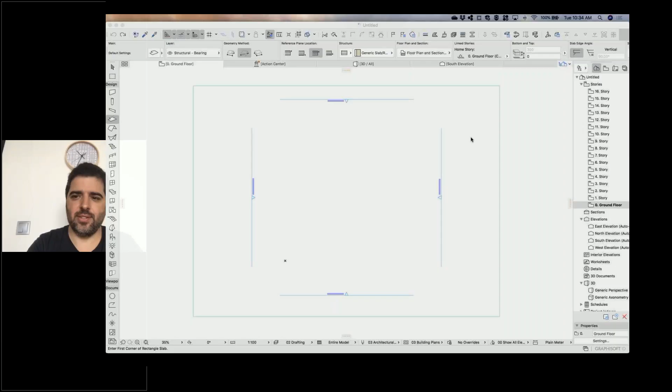So, okay, here we go now. I will share my screen. So here we go. Okay, so I trust that everyone is seeing the screen.

Yes. Okay, perfect. So guys, I just opened a file with an ArchiCAD 24 default template. Since this is going to be a multi-story building, I also went to the project map, and under the stories, I right-clicked. I went to the story settings, and I just changed the height of the first 5 stories to 5 meters, and then I kept inserting above more stories to have

16. Let's say we want to go into 20 stories, so we just click to insert above, and you will duplicate the number of stories with the height that we have assumed. So let's do this, all of you. Just make from ground floor to the 4th story a 5 meter story height. Then from the 5th to the 20th, a 4 meter story height. And then, very important, the story where you have clicked last when you click OK, that will be the story that you will end up with here.

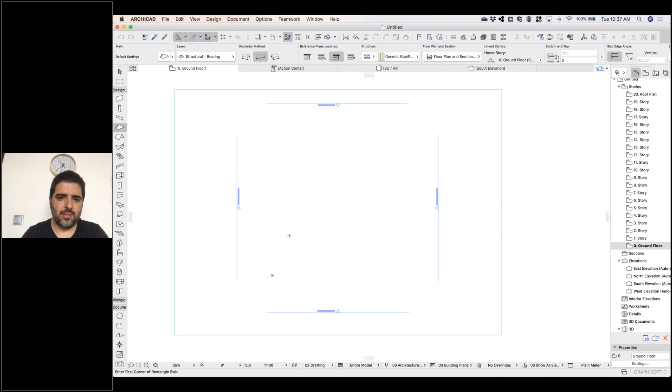So we click OK, and you see again, because I had this one selected, this is the story that we go to. So let's double click on the ground floor. We go back to the ground floor and we're going to start our design here. Also very important, we have by default in our template these 4 markers here. These 4 markers are telling us the different elevations: the south, the east, the north, and west elevations. So we can just use this to model our project inside here.

And the tool that we're going to use to start our project will be the morph. If you're not familiar with the names of the tools yet, you can just click at the edge of this palette or toolbar, and choose, for example, morph, and just draw, let's say, a rectangular shape, or even a more complex shape. So our building footprint will be something like this. Okay, is everyone following?

Yep. Okay, perfect. I also did one more thing here: I took a slab and drew it here so that we have some context. A slab that I drew with 55 meters by 40 meters. Let's say this is our land plot, and with all the setbacks, we had to draw something like this. So now we go to 3D to see how this works. You press either F3 or you go here on this tab and you see it.

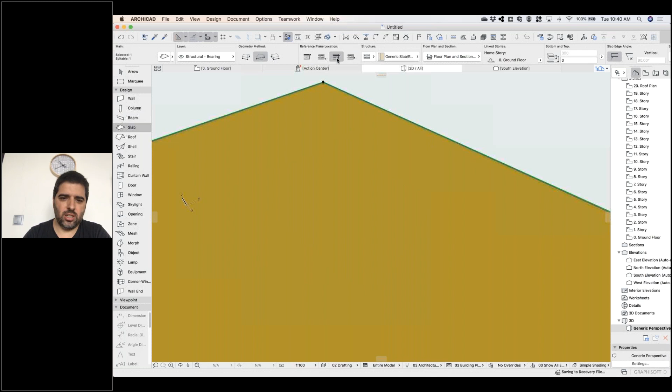And in our 3D, you will see that I have my morph together with my slab. If your slab is overlapping the morph, select the slab and change the reference plane to this one on top so that our slab moves to the bottom, so that the top of the slab is the bottom of our morph. So you see at the moment I have this morph in the terrain, in the land plot that I have created.

Okay, so what are we going to do now? Selecting the morph, we can just click on it and choose, for example, the push-pull. Make sure you have the morph selected first, so it should say here all selected one, and it should say that it's a morph. And then we click on it on the surface, and we choose the option to push-pull.

And you can see that visually, because we have created the stories, we can actually choose until when I want to push-pull. Let's say I want to push-pull to the 4th story, because this will be my podium, and then on top of the podium I will have another shape for this tower. Let's say we have a shopping center with 4 stories, or a car park with 4 stories, and then we'll have a tower that will sit on top of this podium.

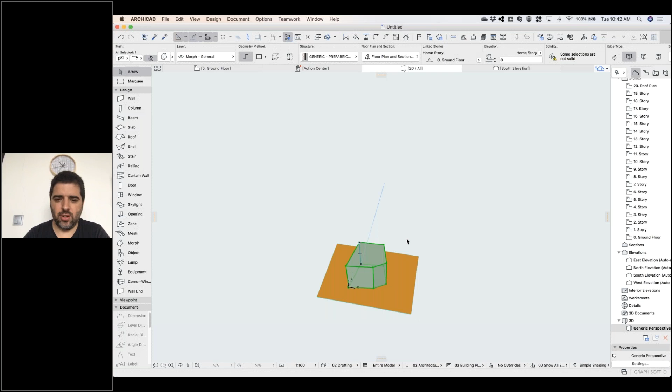Okay, are you all following? I don't see any text on the chat, so it should be fine.

Okay, perfect. So just to see how this is turning out, we can go to any elevation and see that this is actually being automatically populated. Okay, so I can just go to any elevation and see this happening. So I have my site and I have my building already placed there. Okay, so let's continue then.

I can see one thing: for example, I extruded the height of this one up to the 4th story, but actually our podium should go all the way up to the 5th story. So how can we change this? I just click on it again, and using the push-pull command again, I just drag it to the 5th story. And just like that, it's done.

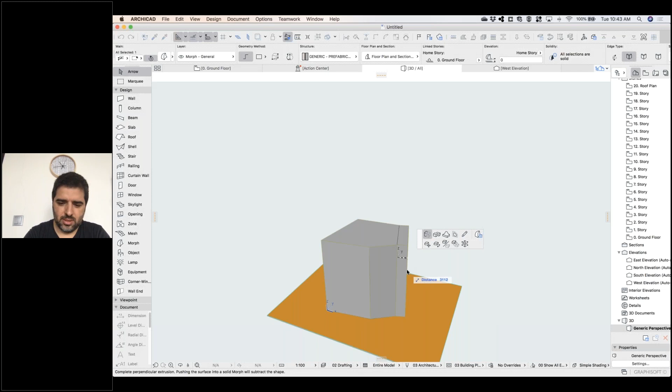So we can also do that horizontally. Let's say I want, for some reason, this plane to move 5 meters to the right. So I can now have a shape that is changed. And let's say I want this line here to move. So I can just take this one and stretch it to one end, and now I have a flat side here. So this works a little bit like SketchUp. So you guys just spend some time playing with it.

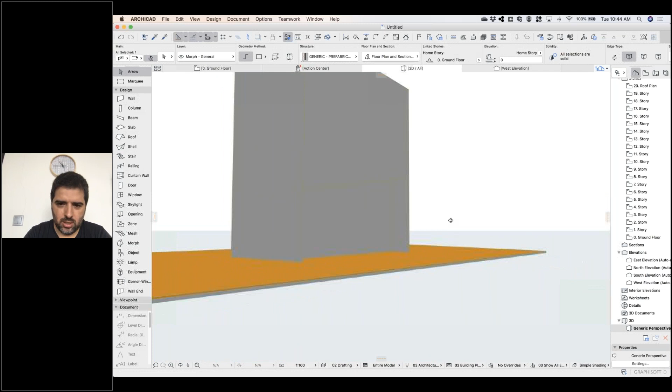I could say, later on for my project, I wanted to have here some shape, say on this facade. Say I draw this line here, and I want to offset it by some portion. I want to have some shape, or some subtraction done to this element here.

So it's up to you how you want to continue editing the shape. I'll just keep it simple, just like this. Okay, so we have the podium already set. We can see that if I go to the first story, this shape is here, and I continue going up: third, fourth, fifth, sixth story. When I get to the sixth story, it's no longer there because it's not touching that one, right? But let's say we want to see this element even when we are above.

So we can go to the sixth story, and then we right click on the fifth and say we want to show as trace and reference. Meaning it's like when you use tracing paper, you're seeing the shape of the element below. And if you want to have the site as a reference too, you can do the show as trace and reference from the ground floor. So with this one, you also have the land plot that was generated there. Okay.

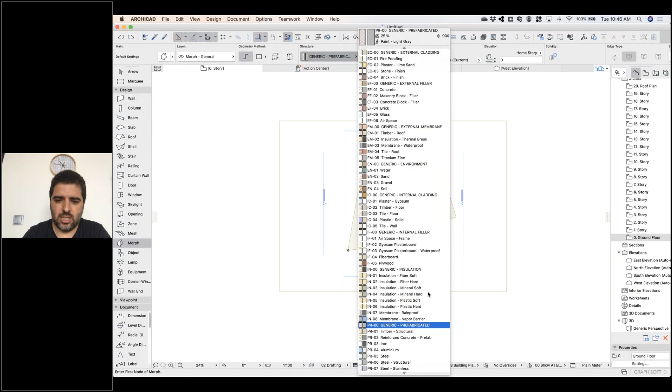So now, let's say on top of this one, we want to have another tower that will be just a square tower. So we go back to the morph tool here on the left side of the screen, choose morph, and we can even choose a different material. So instead of prefabricated as it is there, we can choose, for example, glass. So under the structure, you choose glass, and we're going to draw somewhere here in the middle.

We choose the rectangular shape now, and we're going to make a 10 meter by 10 meter tower. So I put 10,000, then arrow down 10,000. So this will be the core of my tower. Okay, so it will sit on top of this. Then I could develop some lift shafts here, some staircase well, whatever. And basically this would be my kind of building.

Okay, all of you following? Okay. Okay.

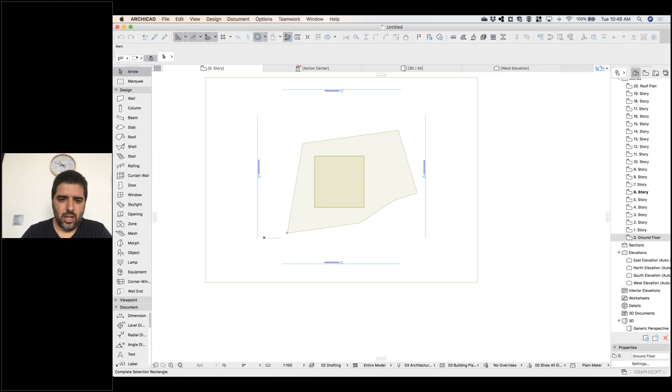Okay, so now we can go to 3D here. You can press F3. It's faster to see the change. So I can have now this tower here. I can extrude it below 5 meters, and I'm extruding up actually 4 meters. And you see, it's very useful that we always have the visual to snap to the story height that we want.

So let's say this will be our tower, and we can just use this to check how our building is done. We can go to a section and see that our tower is now set. Okay. So let's go back to 3D. Let's say this is our design, but we want to make something even more complex out of this. So you don't need to follow this part. This is just to show you how we can edit the design further.

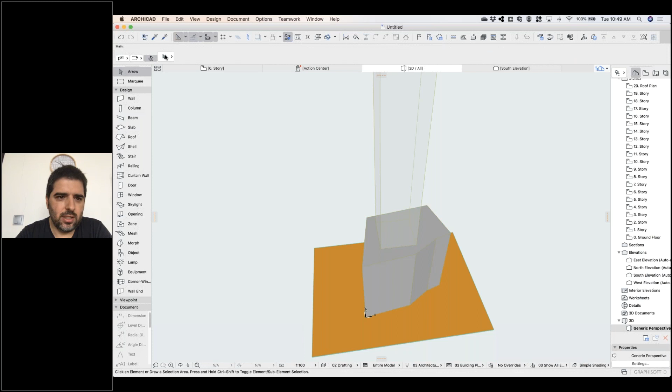So I will change this to select just the surface of the morph, and I will rotate this upper surface. Right.

Okay, so I'm just gonna make this a little bit more interesting. So I've skewed the tower. So you can see here, I have rotated it. So now what will happen is on every story, I see the tower rotated. Okay, I'm seeing the podium rotated.

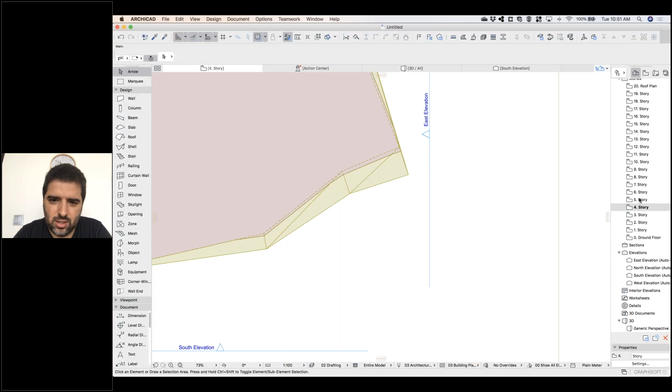So for now, I'm seeing only the full projection. So it's showing the outlines only of this, but I want projected with overhead. So if I do like this, now I can see, okay, on the ground floor, this is my podium, where it's cutting on the first, second, third, fourth, fifth. And then I can show every story onwards from here. Okay, obviously this tower towards the top is always the same, so it doesn't make any difference.

Okay, so has everyone followed so far? We have some questions. Yeah, I see. It's a component-based CAD software. Can I import my pre-designed steel structure? Yes.

Okay, I know that ArchiCAD runs on Surface Pro. Obviously, the more RAM, the more powerful it is, the better it works. Yeah. So you need an operating system where you can install full-fledged software. So that's why on iPad it's just for apps. So ArchiCAD doesn't have an app. The only app that we have in our ecosystem is BIMx.

Okay. So if you use SolidWorks to design the detailed connections on structural components, you can bring them inside ArchiCAD through IFC.

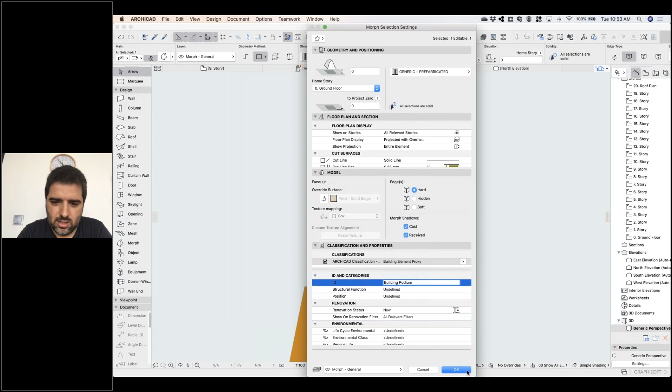I click OK. So what happens is that now within my project, I know that I can ask, hey, give me the areas per floor from the building podium and the building tower. Okay. So how do I get that from my model? I just go to the schedules here on the right side. I'll go under elements, and you see, by default, ArchiCAD already has a few schedules. Let me open this up a bit more.

So we have wall schedules, opening schedules, door schedule, windows, object schedules. Obviously, we don't have any of this so far. So we only have massing done with a morph. So what we will do is we'll create a new schedule by right-clicking on top of elements, click new schedule, and I'll call it, let's say, concept design. The name will be area schedule.

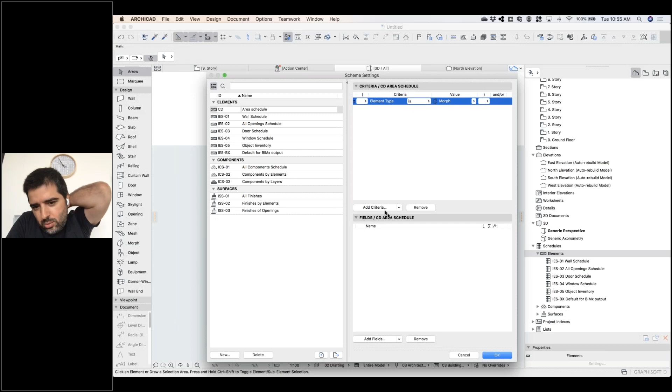Okay. So what do I want to schedule? This is like playing the game Guess Who. So the element type is a morph. So this is the element that I'm scheduling. And I will add a criteria that the element ID contains the word building. Okay, because imagine that I had a lot of morphs created on this project, and I don't want to schedule every one of them. I just want to schedule the ones that I identified. So in this case, I use the ID to do that. Okay, I think that this is clear.

And the next thing I'm going to do is say which fields I'm going to schedule. So from the morph, I want the area by story, and I want to know what is the ID of this element. So if it's tough for you to find it, you can just write here on top ID, and it tells you anything that it could be the ID. So I will choose the hotlink and element ID, or only the element ID. Actually, I don't need the hotlink, so remove.

So I can drag up first the name of the building, then I will have the area by story, but I could also have, let's say, another setting, which is the story.

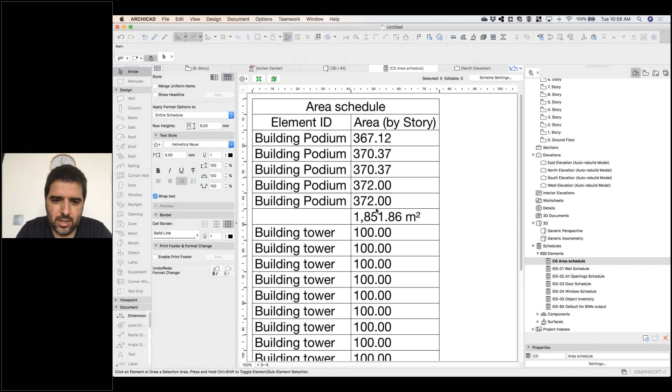Double click, and you see here that under the building podium, I have this height by story, this area by story. Then on each floor of the tower, I have this area by story. So in total, we have 3351. This is the total of the residential.

So if I show headline, it means that it will organize it like this. Let me just make this a bit smaller so you can see. So I choose to show headline. If I want to merge uniform items, I just see, okay, the building podium is this much area and the residential is this much area.

Let's say we could have more area for the whole residential tower. So what I can do is just go to the model, and let's say here on this side, I choose to make this tower wider, let's say by 2000. So by increasing it here by 2000, when I go to my area schedule, you see now I have 1800 square meters for my tower.

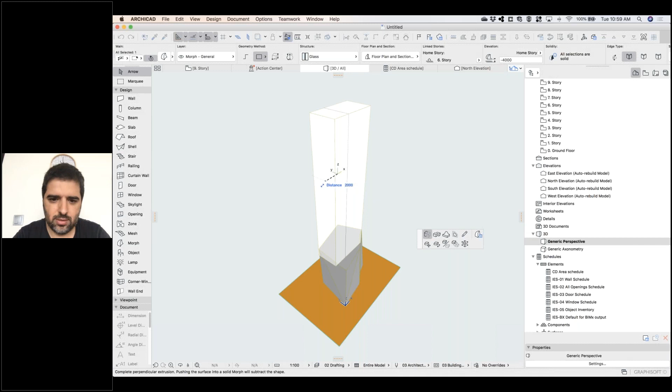Okay, and if you need to have, let's say 2000 square meters or 2100, you can just go to the 3D again, extrude another side. Let's say you want this to be another 2000. And now I can go to my area schedule and I have more area. Let's say I could build up to 4,000 square meters on this project. So you see that with this, it's quite simple to keep doing your design changes, and then your project will reflect the areas, the quantities immediately from the model.

And let's say now if I choose to rotate this because I want this tower to be a bit rotated, I can just rotate it here. Obviously, in terms of areas, it keeps the same, but my representation of the project is now different. So everywhere in every story, I will have a representation of my tower correctly done. Okay. Any questions?

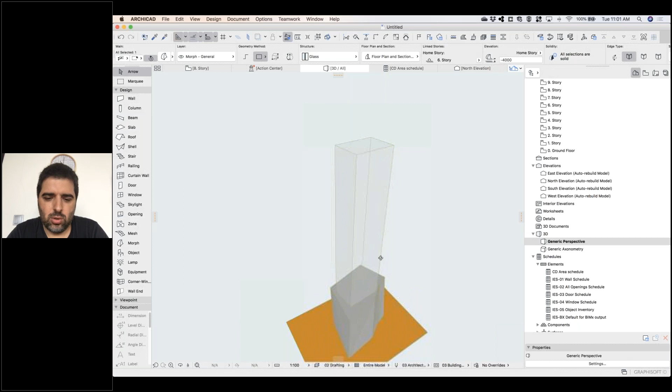Okay. Okay. So yeah, I still see that the discussion is still a bit around the computers. Yeah, I can share the link later for the recommended specs for a machine running ArchiCAD. Don't worry, Marcelo, I will do that. Yeah, I will share that.

Okay. So guys, let's say that we got to this point where we have just a building massing. We're happy with the shape. We can go around and, in this case, I select this point and I want to slant this surface here. We can start playing around with our building. And let's say we want to add some more detail to this project, okay? So what could we do?

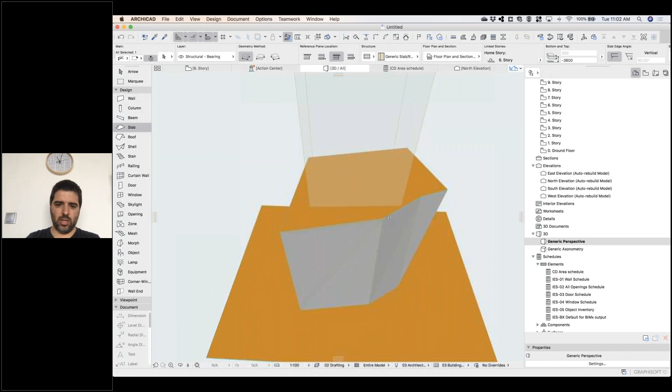Let's say I want to start going here to the 6th story and place a slab that has exactly the contour of this podium here. So I will just click and follow the contour of the facade because I have the representation of the edge of this project. So I could just bring it here and I would have now a slab that is sitting on top of my podium. Actually, this one should be on the 5th, not on the 6th.

Then I could go to each story here and say that, okay, for this tower, I want to have the slab that is placed here on the same location as the morph, and I choose to click on the edge, and I will have a 2-meter balcony all around my building. Okay, so I go to 3D, and this is what I have.

Okay, and let's say that we want to have this repeated everywhere in every floor. So obviously we can go and copy and paste in every floor, but ArchiCAD allows us to do this in a faster way. So I'll just multiply, and I want to elevate copies, spread. I know the floor to floor height is 4 meters, and I want to set the home story by elevation. Okay, so quite simple.

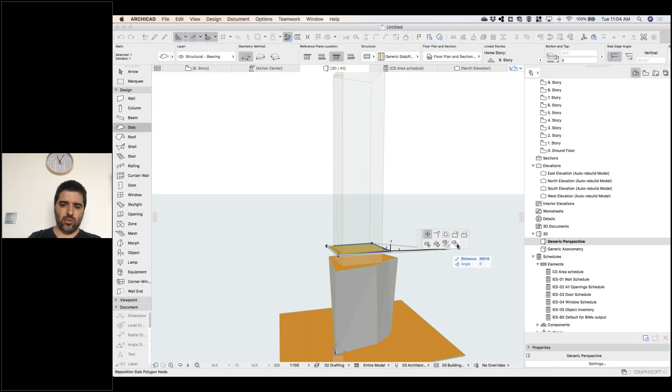I'll repeat the steps. Select the slab, click on it, choose to multiply, elevate, spread every 4 meters, set home story by elevation, because this means that every slab will belong to the floor where it's sitting.

And then we click OK, and we just drag all the way up to the height where we want these. Okay. So we have a little bit more detail here. So we could go to a section or an elevation and see how this is turning out.

Very interestingly, on a section, we see here that the building is being cropped on that side. We can just choose this slider to open up and see that we can actually change the width of our marker. Obviously, when we go to 2D, the marker will be extended here based on what is showing.

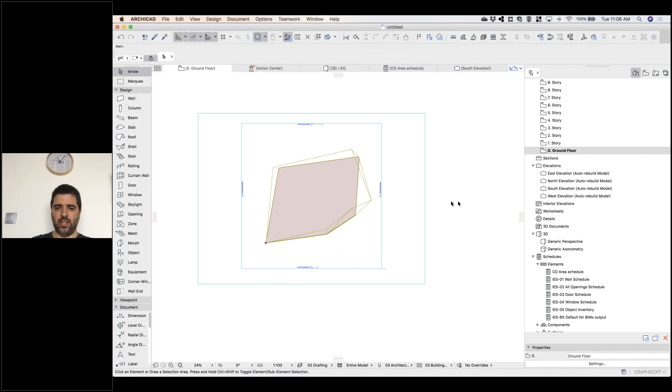Okay, we can also do this manually here on the plan by choosing to extend to the limit that we want. So just click and use the edges, this move stretch option, to extend the width of each one of our sections. Okay, so we have now added south elevation, checked on the south elevation, north elevation, and we have an accurate representation of our project, how it's shown.

Let's say we want to add more detail into this project. So let's go to 3D, and it's nice for us to do this kind of editing directly in 3D. So let's say I want to create some curtain wall pattern for this shopping center or car park or whatever here. So I will choose a curtain wall, double click on the curtain wall, and from the arrows here we can choose what type of curtain wall we want to have.

So this can be a generic curtain wall. We can choose many favorites. So we can choose one for the whole thing, one for the scheme. So let's say we want to have this kind of honeycomb scheme here. So we just double click on this one, and this will be the height of our curtain wall.

So we'll choose 2,500 here by 2,500, because each floor that we have is 5 meters. And let's say we put 1,250, 1,250, 1,250, 1,250. Okay. So this will be our pattern that will be repeated.

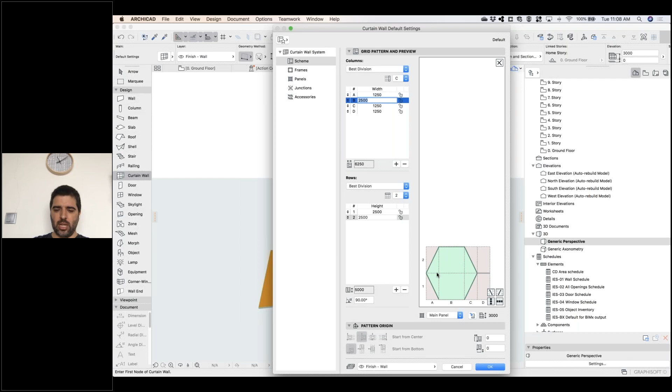Let's say if we want this bigger, the B, we can do 2,500 or whatever dimension, so that this shows exactly the shape as you want to see it. Once you're happy with this, what will happen is I will have this panel that will be glass and the rest of the panels will be solid. Once we're happy with this, we click OK.

So this will try to place this shape in our project. Obviously, I have complicated it a bit by breaking these surfaces into different triangles. So what I want to do is fill each one of these triangles with one curtain wall. Okay, so how can we do this?

Basically, I will choose curtain wall as we have selected. Then I will choose the option to define the boundary, and the plane input method will be the second one. So if you can't follow this, it will be saved on the video. I think this is always a bit tough to understand the concept. So basically, I'm choosing the plane input.

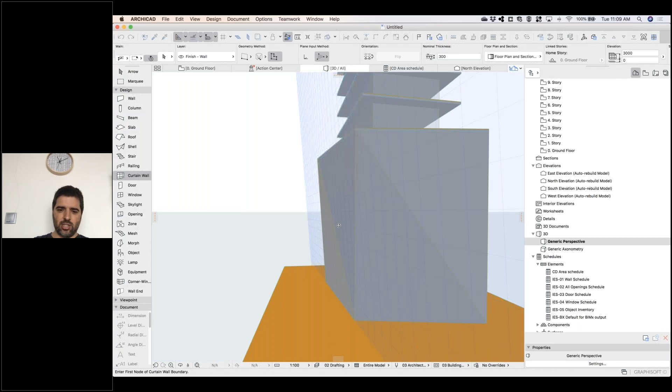So the first thing I do is I click on a plane. So I'm clicking on this one. And what ArchiCAD is doing is creating this blue plane that will be attached to the surface that I have just clicked on. So it knows that I want to do a curtain wall on this surface here.

Second thing is I'll be drawing with a boundary. So you can see here, it says that I have to enter first node of curtain wall boundary. So what I will do is I'll press space and click here, because with space, you can read what is the boundary that I have available there. And when I click, what it's actually doing is placing immediately the curtain wall there.

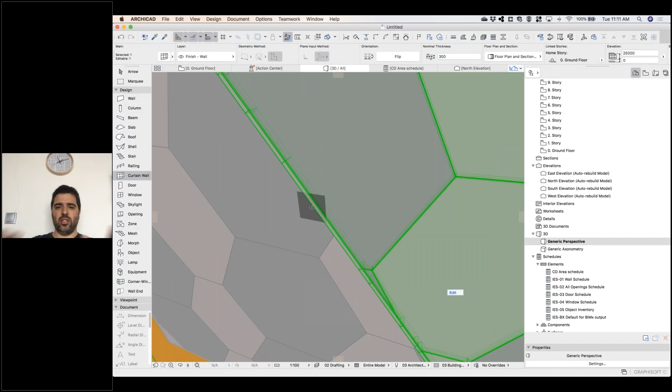Okay, so I just keep doing this for everything else. I click another boundary, space, click. So I have another curtain wall placed there. I know you might tell me, oh, they're not starting in the same position. This will be super hard to connect with this pattern, because actually these curtain walls would have different lengths here because they are slanted. But I will show you how we can adjust that.

So I click on another surface, space, click, another surface, space, click, and so on. Oops, even I miss sometimes. Surface, space, click, surface, space, click. And you see I have actually just followed through with my whole scheme.

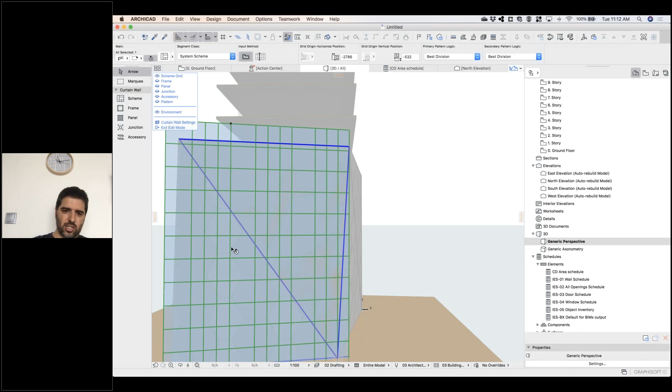So what is happening here is that if you click somewhere along the same vertical line, you see that I clicked here. If I do the same thing up here, it will be more aligned. But we can actually choose to edit and move the scheme grid. I'm turning off everything and moving the scheme grid, all of it, to the side. So if I overlap it here, you see that it's overlapping with the previous one. And now I exit. Actually, I moved a bit more.

So I edit the scheme grid. You can see I have the one below here as well. So I click this one. I move it to the side, one more. Okay, seems to be more or less correct. So you see I managed to adjust slightly. Obviously the height here won't be the same. So if I want to edit in terms of height, I choose the scheme grid. And okay.

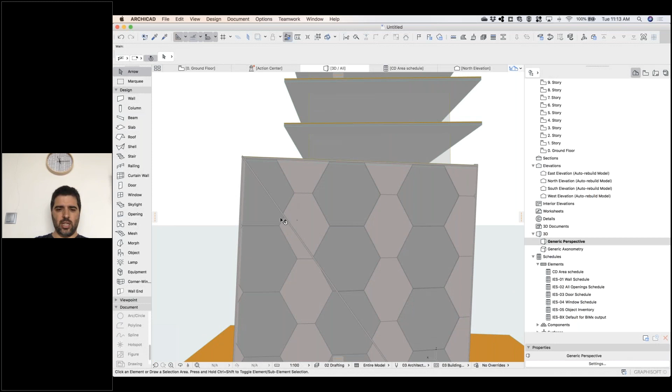As I mentioned, since this is slanted, it's hard to connect everywhere the same because the true length is not the same everywhere. But I think you got the idea. And if we go now to the elevations, we start seeing our project design taking shape, and see how this is moving forward. Okay, so we have, let's say, completed the podium.

Now let's say I want to do a similar thing to the residential. I go to the 5th story, and I know that this is my morph. So this is the edge of my apartment. So I will choose another curtain wall to be my apartment pattern. And in this case, we will even do our own pattern. So I'll choose an empty one. In terms of width, let's say 2000 each panel. In terms of height, we want 3000 one panel, or let's say 2600. And then we add one more, and we say this is not 2600, it's 1200.

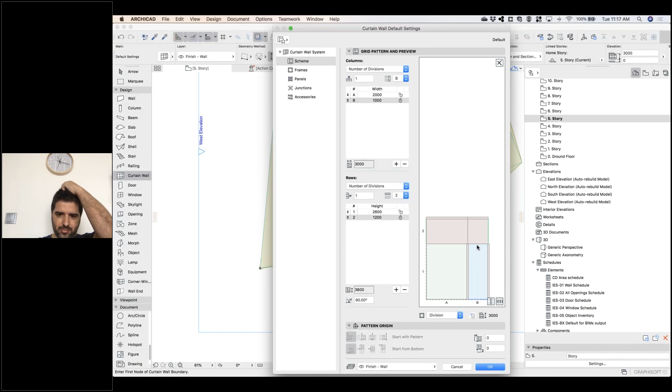Okay. So we can actually choose exactly how we want this curtain wall to be. So I will choose the overall height for the curtain wall. We saw that this is 3800. And I will choose to place this curtain wall. I click OK. You see that it has an ID as well. We can call it curtain wall 01, and then each one will be increased to 02, 03, and so on.

And now I will choose a different construction method. Before I was going by boundary. Now what I want to do is choose by pressing and holding here. I want to have a curtain wall that will go around my units. Okay.

So let me just go to display order, bring to front, because it was staying on the back. So what happened here to my curtain wall? Because under my scheme, I have the number of divisions set, what it's doing is spreading along this facade. I have a locked value here, which is 1 meter, and an unlocked value, the 2 meters. So what it's doing is stretching the 2 meters and keeping the 1 meter.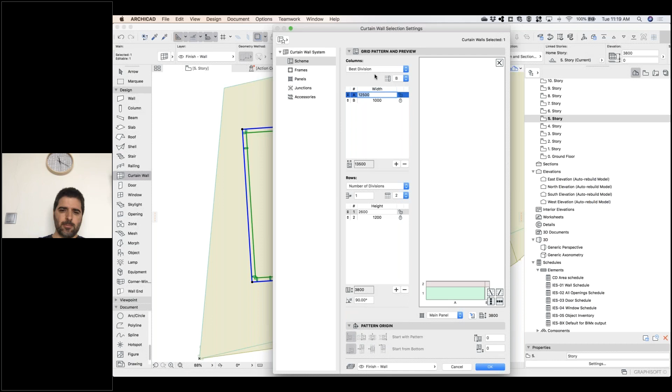But if I choose fixed sizes for all of them, and I want, let's say, 2000 again. Okay, 2000. So what it will do is spread around with all this repetition of sizes. Obviously, when you cannot make the full size, it will just place a smaller one. So we have a 1 meter, and when it was going to do a 2 meter, when it gets to the corner, it just has to bend it.

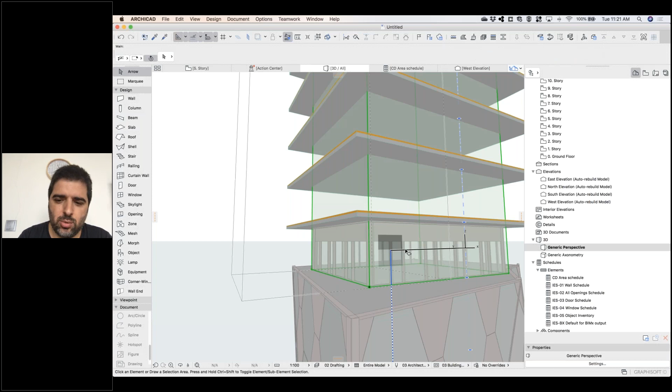Okay, so I go to 3D and I check. Here is my curtain wall that is actually placed inside my morph. Okay, so how can I copy this one? I could do the same thing as I've done before. I just select it and then multiply the same way as I've done before. But I'll teach you another way to do this.

So we go to the floor plan, and we right click here on the 5th story. We choose edit elements by story. And we want to copy every curtain wall. So I choose all types, only the curtain wall. I want to copy it to all the stories above, so I want it from the 6th onwards. I click OK. So what it's doing is copying it along. I don't need to do anything extra for this to happen.

I go to 3D and here you go. I have my tower already done. Obviously, we could have done this the other way, just copying and pasting, moving it onward manually. So we could have done the same thing with placing a glass railing here. This could be a wall going around, could be a railing. So let's say I even want to show in 3D how we do it.

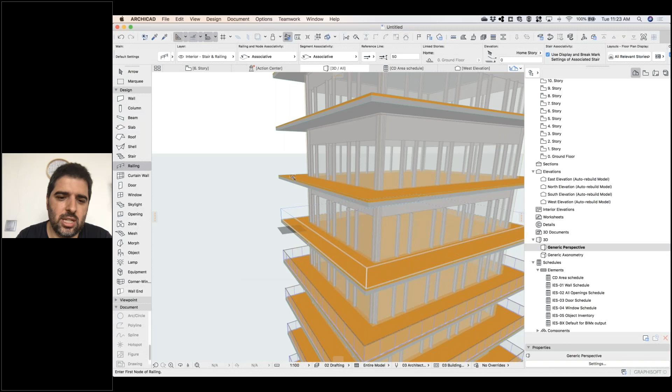So I choose here frameless glass railing. If you click on this small arrow next to railing, it will show you some predefined railing types. So I choose this frameless glass railing. And if I press and hold space on this slab contour, it will place the railing around. And you see, I don't even need to be copying. I just space click on every floor, space defines the contour: click, space, click, space, click, space, click, space, click.

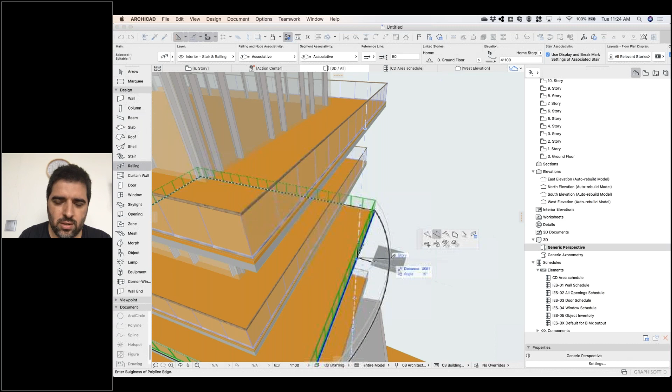So let's say you wanted to create some different movement to the facade. Let's say you want to move every other slab 1 meter to the side. So I put 1000. Even though I only moved the slab, can you see here that the railing also follows? Because the railing is using the slab contour as a reference. So if I want to, for example, take the edge of a slab and curve it, you would also curve the railing.

Let me just cover the rooftop. Okay, so you see here how quickly we started having more data, more information for our building. I already have the curtain walls, I have the railings, I have created some dynamic to this facade, and I have my area schedule that is representing exactly what I've done in my project.

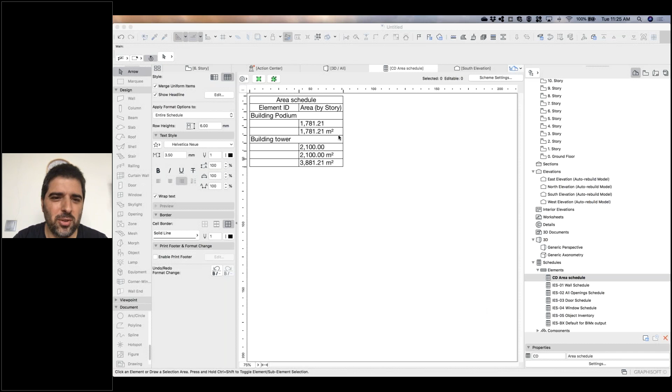Okay, if you all followed. Can I get some feedback? How many people have managed to follow? Or are all of you lost? Okay, so we have some following. Okay, perfect.

So basically, we could move on and continue editing this. Obviously, I can start placing here the lift core. I can start placing the slabs. I can even start using some lines, if it's easier for me, to define how I want to do this. Let's say I want to split this into two bigger apartments here, a smaller apartment here, and then the lift core. I can get the object, for example, lift. I think they call it elevator here. Yeah, so I can choose the elevator.

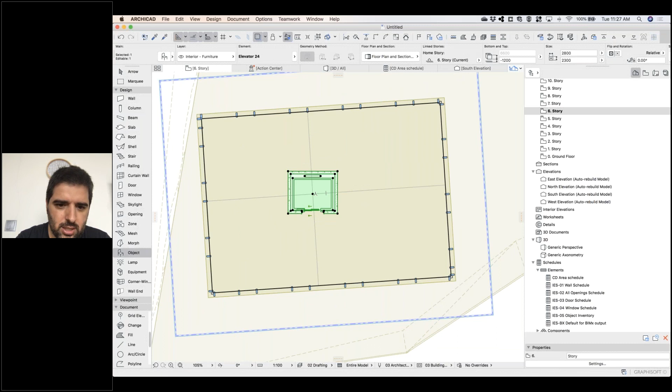I want to show the shaft. Okay. Seems like this area. Lift. Okay. So we can start arranging this. Let's say I want the lift to be shown on every floor. So instead of home story only, all stories.

So I want to say it goes through all the stories, what the lift overrun is, everything. Click OK. Then I can go and see. Actually, I should say that it goes all the way up.

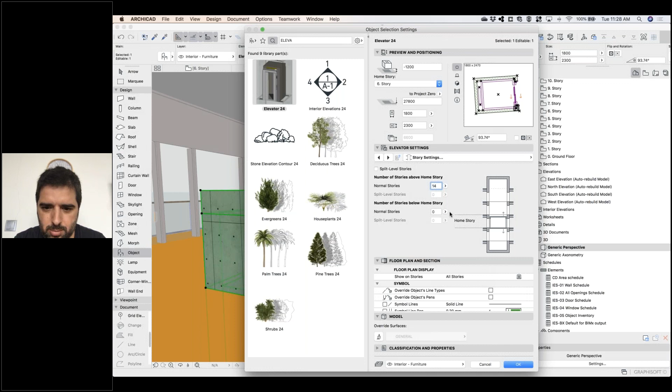I want to go 14 stories above, 0 stories below, and here you go. So I have my lift placed, actually only one less here, 13. Okay, and if you want to just go and check how this turns out in our layouts, we have the views that are set here under the view map. Then we can check the layouts, and by default, this project is represented on the layout. So if you have set up your layouts properly, this should show directly there.

We can even go and automate how these layouts are being generated. So I can just take every floor plan here, from ground floor all the way up, and I just drag it to this folder. And what it will do is it will create one layout for each one of these drawings. And you see here that it starts documenting properly each one of these stories. Okay. Obviously, the more information you want to add, the more

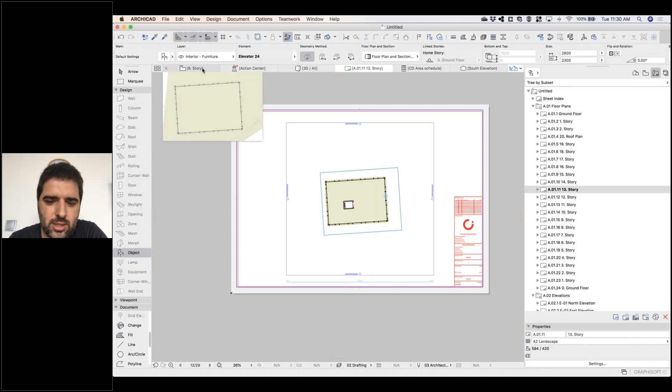it will represent here. One more thing I'd like to show is how easy it is if we want to get some sections from here. So I'll just choose, from the viewpoint, the section tool. And let's say I want to have a section in this direction, even going through the lift core. Immediately this section becomes visible here. So I double click and it opens up the section that goes through my building.

Okay, I think that with this it's pretty clear how we can continue editing our project. We can start placing the furniture. Even if we have repeated elements, we can create a module, but I don't want to go much more into detail. The idea of this session was to go through a concept design stage. So I think that this covers it quite well.

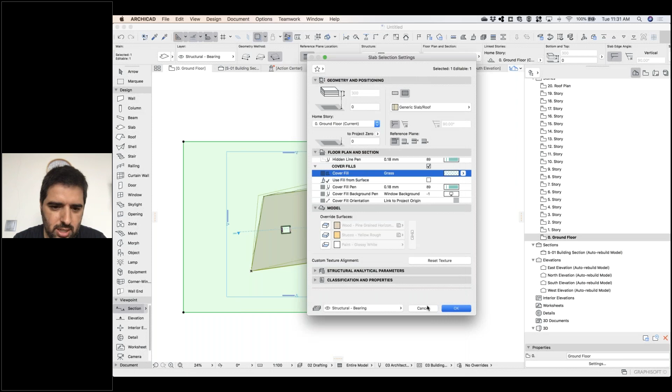One more thing we can do is we can start working on the 2D representation. We can say, okay, I want this slab outside here to have the grass. I put a cover fill with grass. Okay. Actually, I hate this one, but okay. So I put the grass cover fill. I go a few stories up.

And I want to say that this slab for my condominium is showing a cover fill for plank floor, so that we can start representing exactly how this looks. And even if I want a cover fill for the plank floor, I want it to be oriented to my slab angle. So I want it to start here, and I want it to have this orientation.

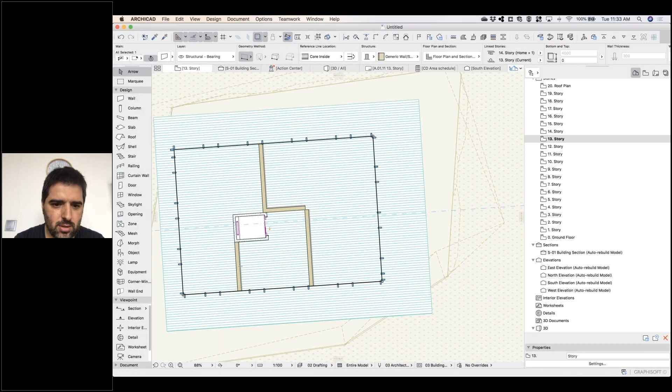Then I can obviously start adding walls. So I place a wall here, place a wall here. I don't know. Let's say this side will be a staircase, and so on. Okay, so basically, I think that with this, we could conclude the session at this point.

Obviously, we could go to 3D and render. Let's say I want to render this view. It will automatically render as it is by default. So we can just start having some quick previews of this. You see, this is just the out of the box right click and render. Then we can start adding more and more detail. We can make a bigger rendering depending on how you want this to be done.

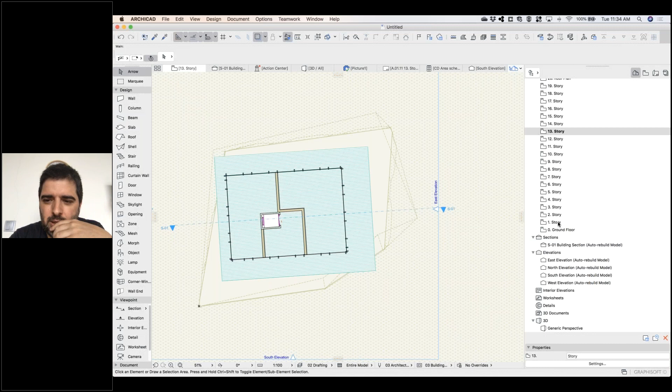Another thing that can be set, for example, is how we want to create the grid lines. I know I have some structural engineers here. Probably you're very mad at me because I didn't show this. So I'll do this part to show you a little bit. So for example, I come here to the 5th story, where I start my residential tower. And I know that I have

Marcelo, there was a question. How about annotation for schematic presentation on elevation or section? Okay, areas and all that, right? Yeah. So dimensions, spacing, yeah. Okay. So yeah, we can do that.

We can use the zone tool that will give us the naming of the space. Let's say at this stage, I don't even know exactly how I'm splitting the areas of each apartment. So I will call it apartment 1. And I can draw the area of apartment 1 that will be something like this.

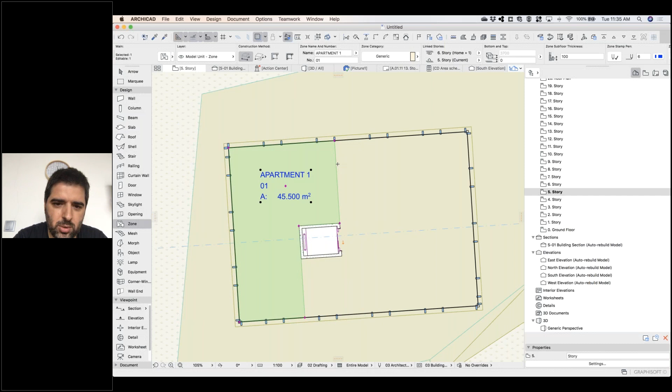Okay, let's say I leave this space for, so this will be the apartment 1, and then I will have another one that will be apartment 2, and I draw here. Okay, let's say apartment 2, and then I call another area circulation. Okay, so for that I will have this 1, 2, 3,

and we can even classify this differently. So if I choose, let's say this one, I will keep it as generic, but this one, like the 2 from the apartment, I have it as residential. Okay, and we can actually choose to show the colors of these zones. So if I select the zones and bring them to the front, I can choose to show the colors of these zones. Let's say this one, I don't want to show it. So we can start seeing here exactly how we want this to be represented. We can even have different colors to show one zone and the other, and then obviously multiply this story by story.

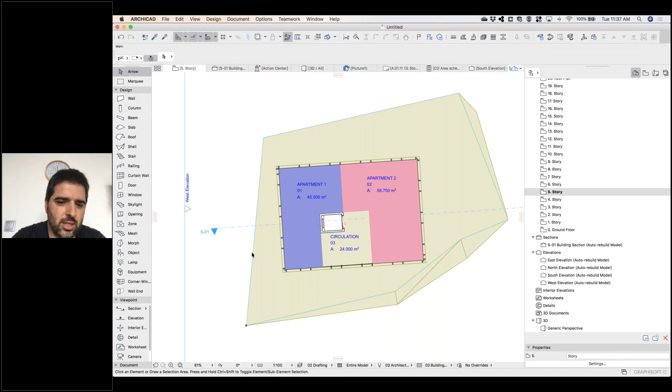Another thing that we can do is automatically label the elements. So for example, let me close here viewpoints. Let me open this up. I want to label and I want to label with auto text. Let's say I will have a wall type, a wall here. Let me place a wall. That will be brick double plaster. I know that this doesn't make any sense, but okay. So let's say these 2 walls here will be even block. Okay, they're wider. And let me bring them up front because I have the zone that is on the way. Let me make this one concrete.

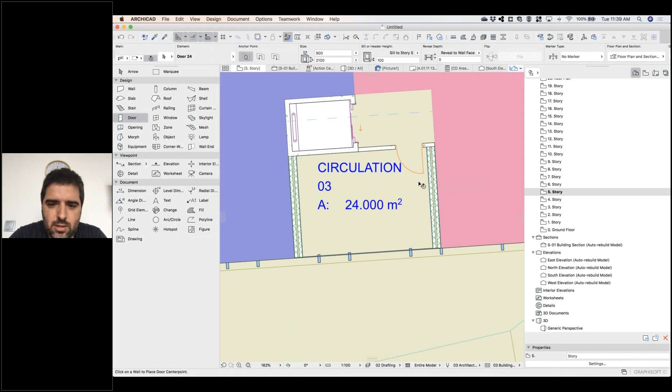Okay, so even I have this, and let's say I want to start placing some doors. I want to have a door here that is the stair door here. And so if I want to label my elements, now I have a few more construction elements. I can choose, for example, I want to place a door window stamp. So I click on the door and it will place this stamp. I will then bring all the annotations up front. I click on a wall and I want a skin list label. So it's giving me the different skins of this wall. Obviously, let me make a bigger scale so that these annotations can be more visible. Okay.

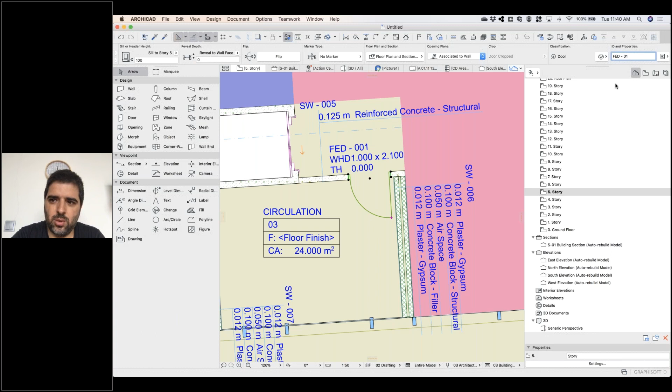So basically, when you start labeling these elements, I'm showing that this is a structural wall 05, this is 06, the door stamp, I want to move it to this location. So if I change any element, let's say this door by right should be 1000. Once I change one property on the door, it will change immediately on the stamp. So we're saying that the threshold height is 0, the width is 1 meter, and the height is 2 meters. The door name is door 001. So if I want to change by any reason the name of the door, let's say fire escape door 001, it will change it there. And instead of 001, I want just 01. So it's really up to us what kind of information we want to add here.

And the beauty of this is that even if I have these elements dimensioned, okay, I have a dimension here, I have a dimension there. Anything that I want to change, let's say for some reason we decided with the structural engineer that this wall will be the same as that one. So you see now immediately my dimensions are different and my label is different. So you don't need to be worrying now and go and relabel or redimension everything. Okay, so you see here it says also structural wall 05, so you don't need to worry about it anymore.

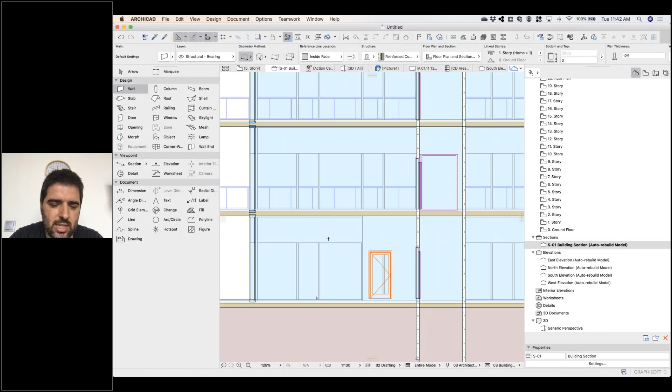And if for some reason you want to change the width here because your engineer told you that this should be a 250 mm wall, you just change it there. The dimensions will change. The dimensions on the label will change. You see that this one is 125 and these ones are 250. So this works for both elevation and floor plan. So you see here, let's say I want to label here. I want to even place dimensions here in all the stories.

So I want you to read every time what is the dimension for this, or if I want to go further in detail and label how much we're going above or below the structural floor level, we can do that. So it's just a matter of how you want to label your elements, how you want to dimension it. Let's say here it makes sense for me to dimension the curtain wall. So I can just do that. You see, immediately we have the dimensions for all the elements.

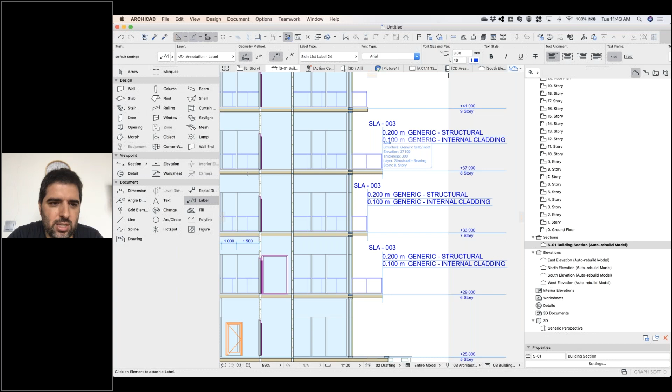And the same thing works also with the labels on a section. So if I want to say what type of slab this is, I just click on each one of them and it will give me the slab type. And if for some reason I choose to change all the slabs to another type of slab, so now we chose that we want a slab insulated with parquet. Once I change this, you see that all the labels will reflect these changes.

So I have plaster gypsum, then this one, then I will have reinforced concrete, then I have insulation, then I have a concrete for filling, and then I have timber. So if I want it without insulation, let's say, I just change here, and immediately I'll have a thinner slab, and it took out the insulation part from it.

So I think you would all agree that in terms of bringing the design from concept stage to design development stage, this can be done quite easily, quite fast, just by editing the existing elements. And you can start by a mass modeling and then move on from the mass modeling to a concept design stage.

Okay, so Zayed is asking about the columns and beams. So I think I can do that. We can do another session to show integration of M&E. I will just show the basic, what I should have shown from the beginning, which is, let's say we have this area. One thing I know is that this element is slanted, so to make it easy for me to work, I'll just rotate it. And let's say, what is my grid line?

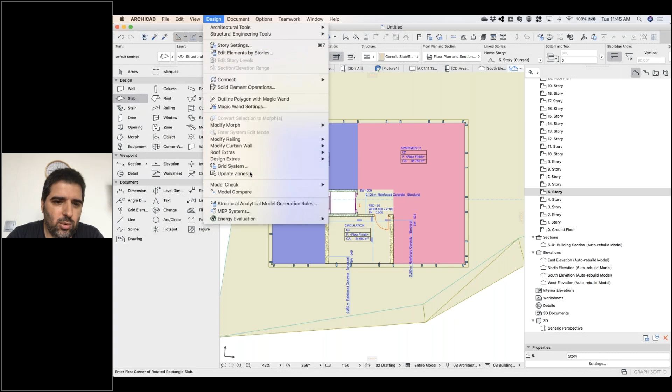I have here 3700, 4800, 5000. So I'll go to my grid line, and I will choose a grid system.

Maslow, just a quick one before you go into the grid line. There is one question related to zones. I think it's better we answer here. Understand the concept of zone on plans; can we assign the zones to be displayed in section and elevation? It helps for the presentation. So if you are in SSA, we have an add-on that can display the zone name in section. That is available from our SSA website. You can actually log in and download the add-on that can be used to name the zones in the section.

So by default, ArchiCAD doesn't do that. I know it's a long time wish from our users. So we have sorted it out. We have developed that locally for Singapore and Malaysia clients. So as Cheetah mentions, if you're a client that has an active SSA, you can just log into our page, which is www.graphisoft.com.sg/SSA. And after logging in, you would be able to find it. Choose enter SSA site.

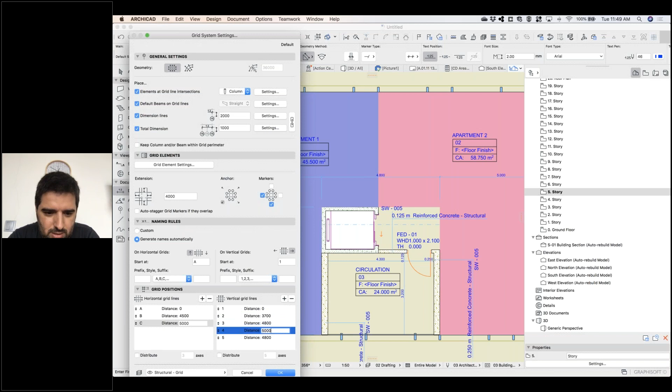And now I need to give the positions for the horizontal grid lines. I will have one at 0, then one at 4.5, then one at 5 meters. So I put here 4,500, then 5,000. Then I just take these two out. And then horizontally, I'll have 3,700, then 4,800, and then 5,000. And we want to place this on every story. So on the grid elements, I want to show on all stories. Okay. The columns.

You will be placing only in one story in the beams, and then we can bring them up normally. So this is how our grid lines are going to be placed. So I just place it here. Actually, I think I missed out. It should be from the center. So this should be here. Yeah.

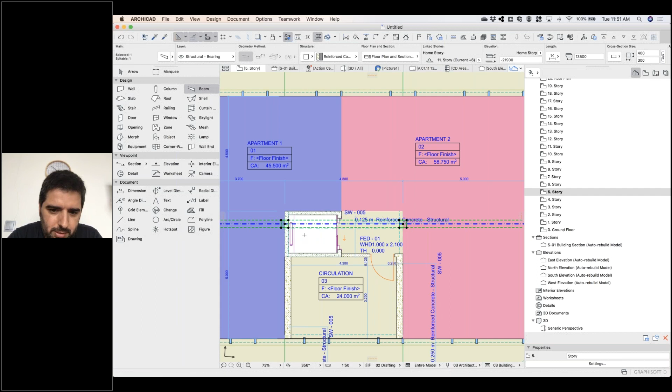So you see, I placed the beams and columns and everything in one go. I can check in 3D. Actually, this one should be moved. I think he placed from the top down and not from the bottom up. If you move the grid, will it move? No, so I have to select it. I should have gone to the settings and changed it there. Yeah.

So these two columns also, they have to move to grid. So I go to 3D, and yeah, so now we have our structural model placed with the columns, the beams, everything. Oh, I should have checked the beam height is not correct. Anyway, I think you understood the concept of this. Now we have the building with the structure, with the slabs, the beams, and you see it's going all across the building.

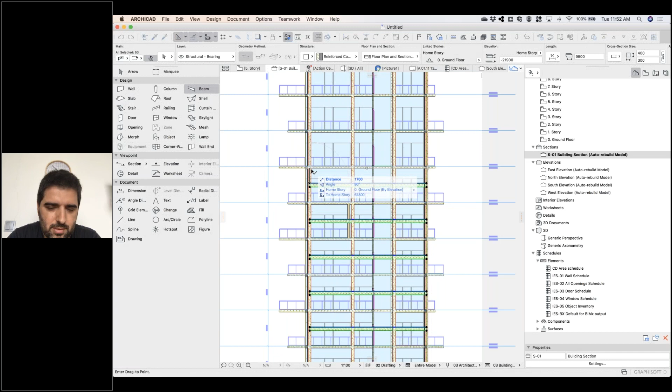Can you set the beams and columns and slabs as load-bearing elements and show only the load-bearing elements in 3D? Yeah, that's a good one. So I'm moving all the beams up as they should be. Okay. So I'll go to 3D. I'll select beams, Control A. Oh, I placed them all the way down. Columns. So you see what happens when you have an architect setting the structure.

Okay, so as Chida mentioned, I can set the columns as load-bearing element and the beams. Okay. Columns also as load-bearing element. Yeah, I think the beams had a preset that was wrong, and I didn't go and check. Load-bearing element, okay, and all the slabs also. Yep. Is load-bearing element, except the ground floor one.

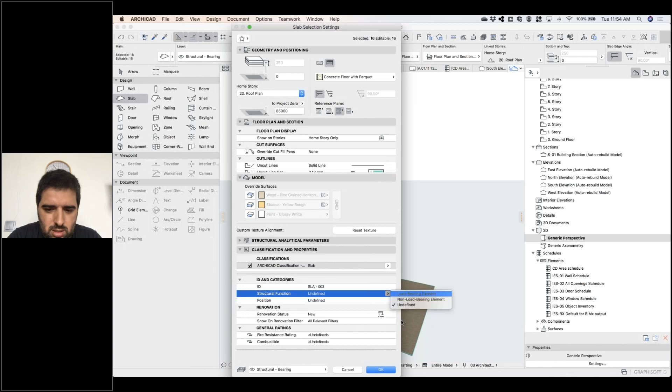Okay, so now if I want to show only the load-bearing elements, you see I'm showing only the model. Yeah, the beams are the ones that were wrong. Anyway, don't trust an architect with the beams. But you see here the columns are correct. So we can have the core of load-bearing elements, the core only of everything. So it's showing us also the railings and the...

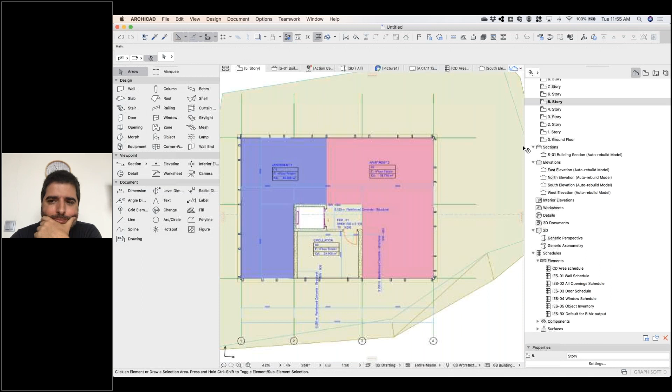So in case architects and structural engineers are working on the same project using the BIMcloud, basically you can set view settings to show only the load-bearing elements for structural documentation, and for architectural documentation you can show everything with the finishes. So that way both architects and structural engineers can work in the same project. But we will definitely arrange another session to cover a bit more. Yeah. And also the MEP part.

Yeah, because I think at this stage it would be enough just to keep the grid lines, and you don't even care about placing the columns yet. So yeah, for now, this grid line placement would be enough. Okay, so pretty much this is what I had to show you and for you guys to follow on ArchiCAD. I have saved another file that I want to show you how this can be done even faster.

Okay, just to manage your expectations, this is not basic knowledge that you need. This is when you get to a point at your office where you need to be really productive, creating a lot of concept design stage models, and you need to prepare many design variations for your project. So what we have is a site that was modeled using the morph, just push and pull all these different building heights. This is actually a map of an area in Hong Kong. This is in Wan Chai, or Sheung Wan, yeah.

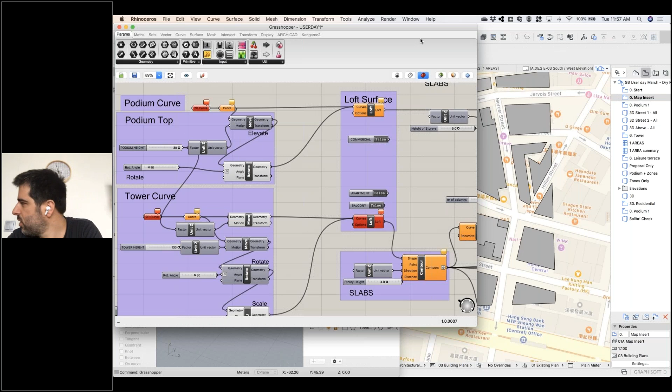And here, let's say we're going to demolish this COSCO tower, and we're going to come up with a different building that will be placed here. Okay, so for this, what I have done is I have set up a script, and this script will be running through ArchiCAD. So with this script here, we can actually have the curves that we get from ArchiCAD.

One curve will design the podium, one curve will design the tower, and then we'll go to the tower and divide it into slabs. These slabs will have apartment zones. It will place columns. It will place railings. It will place the balcony with a certain size. So if I have set up this script once, I can use it anytime for any project I want to do. So for example, this is already connected. So I start the connection here, Rhino Grasshopper.

And with this connection, what I do is I select this ArchiCAD line, and I say here on Rhino and on Grasshopper that I will set a curve in ArchiCAD. And you see what happens is immediately this becomes green or gray, and it goes and generates this script, everything that is connected here. It goes and generates all this. So we keep adding the contours and it is placing the slabs for commercial.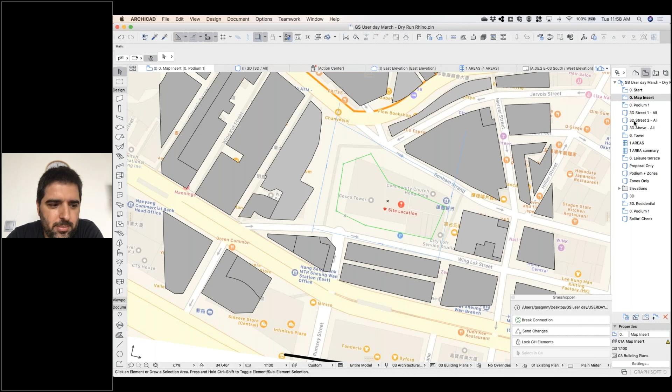So if I, on this commercial now, remember before we had the podium. Now I can go and check, and this podium now is placed here with that shape. So what is it doing? I will go here to my script and say, for example, that

the rotation angle I want for this, instead of being 10 degrees, I just drag here, I move it to 11, and you see, or to 20 degrees, and you see immediately it changes the whole design. I'm just shifting here on this podium using this slider, and it will change exactly everything that I want.

So if I want to change the podium height, let's say I want it to be like 20 meters instead of 30, I can just type here the value that I want, and it will change this. So let's say instead of 30, I want 27 or 25. I do that, and it will reduce the height of my podium.

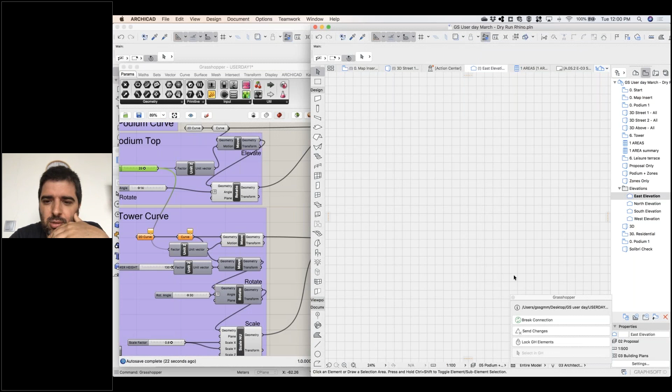Okay, again, if I go and check how this works on the elevation, I just open up here my east elevation, and I have my drawing placed. If I change the angle again and the height of the podium, immediately you see my project will have that placed. And let's say I want to move the angle back to 10. I move it back to 10, and it will rotate the pieces so that they have a different configuration.

Okay, let's see now. I want to do the residential tower on top of this podium. So you see immediately these podium floors are being represented on my floor plan. And let's say I have defined this as my residential tower. So I select this curve. I go here on Rhino, say that I want to set this to the curve in ArchiCAD. And immediately when I go to 3D, it's not there yet, because I chose not to send it yet to ArchiCAD. So you see here, the apartment is false.

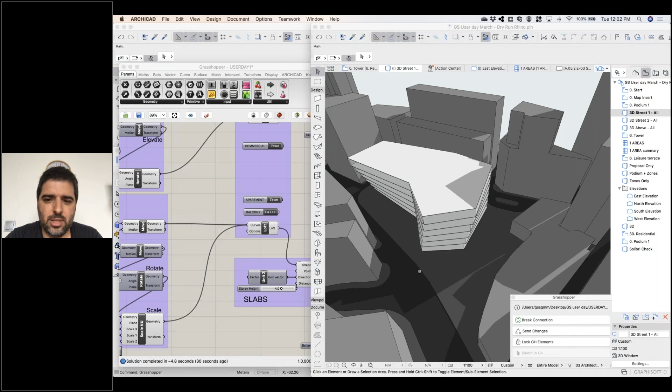If I double click and make it true, it will start sending now to ArchiCAD all the apartments that are being generated here from this script. So you see the podium is being rotated. The tower is also being rotated, and is getting this shape being generated. Okay, so if I want to choose another view to showcase how this works, I do that.

And for example, inside Rhino Grasshopper, I choose to change the rotation angle, you see here is 30 degrees. If I want to rotate this tower more, actually in this case this tower is also being tapered in terms of height. Let's say I want to move to 45-degree rotation. I choose like this, and the tower between the bottom and the top will have rotated in total 45 degrees.

And you can imagine how much work this would give us to do manually. But in this case, it's applying the changes from Grasshopper, and it's going to produce all those changes by itself. So I don't need to worry about this. I don't need to model it manually. So once you have this, yeah.

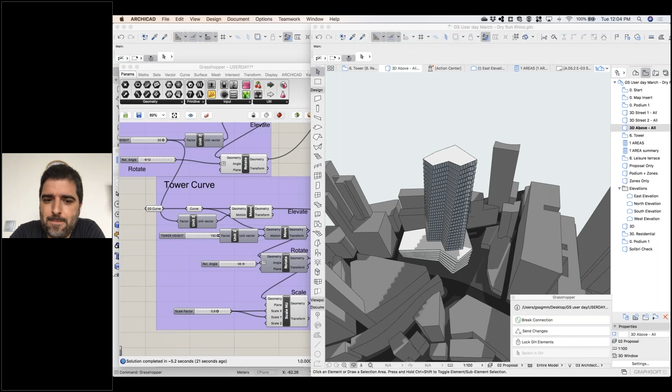There's a question. Is the script going to be shared too? Well, I can share it if you guys want. Wow. Yeah, that's great to hear. Yeah. Thank you. So now every one of you can have ArchiCAD and make a multi-story building just like that, huh? Quite fast. So

you see, okay, it has now updated everything, rotated 45 degrees between this one and that one. If I go to my sections and elevations, you can see that this would also be active. My area schedule will also reproduce this. Actually this tower has gotten the shape of that contour. It has rotated it and it has changed the scale factor. So actually the top of the tower is 0.8 of the area of the bottom of the tower. So the more the tower goes up, the slimmer it will become.

Okay, I think now let me just pause this. Okay, so now we have all this inside ArchiCAD. I can navigate, I can see the shape that is generating. So you see it's quite interesting.

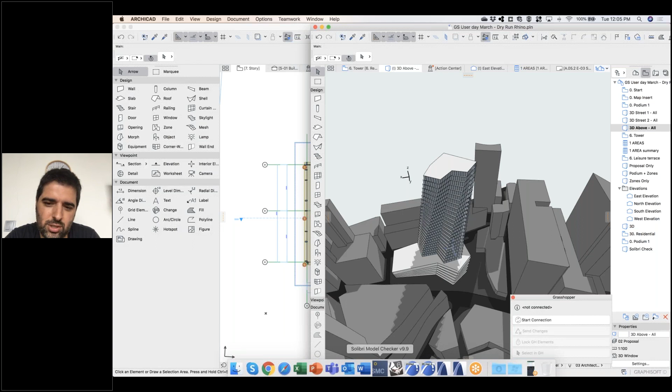If my engineer told me, hey, you're crazy, 45-degree angle, the tower is gonna fall down, you have to change it to another angle, the only thing I have to do is just change it on Grasshopper, but for now I want to impress my client and keep it like that. Then I want to check on the elevations how this works. You see, immediately I have this whole representation of the tower.

And I had a meeting with a client that told me, for example, that he would like these apartments to have a balcony because they have a very nice view to the sea. So what I do here is I'll start the connection again. Okay. Actually, it has quit. So don't worry, the good thing is that it recovers the script.

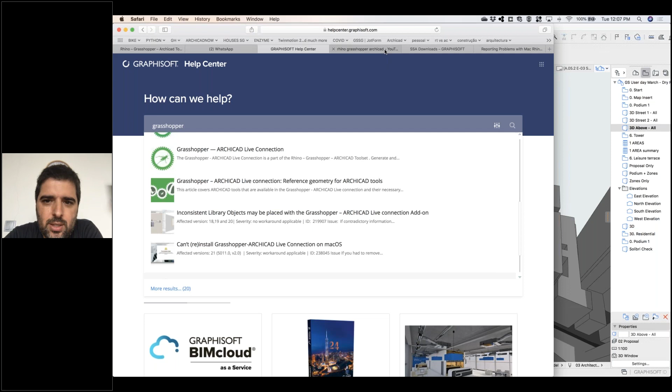So if you guys want to know how to get this Rhino Grasshopper connection working, you can actually use the Help Center and go through the Live Connection add-on. There's already a connection for ArchiCAD 24. You have a lot of YouTube videos. In this case, you have 21 YouTube videos by Graphisoft showing you how to create the script itself. Actually, the way the script is done is very simple for you to just connect to it.

You can also go to the Graphisoft page and look for the Rhino Grasshopper connection. Actually, I have it here. The Rhino Grasshopper ArchiCAD toolset. It tells you that you have to download ArchiCAD, get Rhino and Grasshopper. Actually, there's a 90-day trial you can use, so I think it's good enough for you to test for 90 days.

Then you just download the connection that is available. So you see we have 18, 19, 20, 21, 22, 23, and 24. So this has already been around for 6 years now. And this is very interesting for you to start digging into these kinds of things. So let's see if I have my script done now. Open recent. Let's see here. I open the recovery file. Okay.

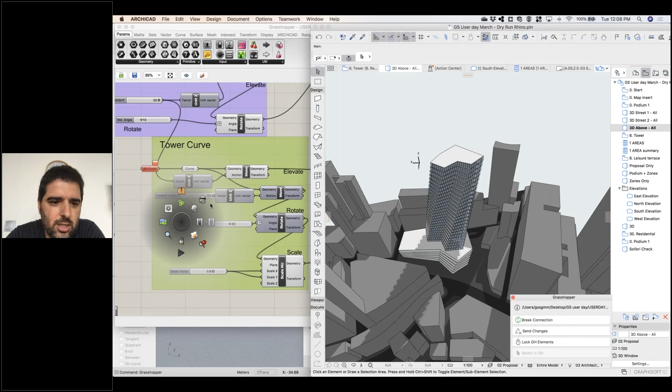So meanwhile, while this is showing, let me start the connection. So you see here, one more thing I want to add is the balcony, as I mentioned before. It has to go through everything and replace the objects again, so it's taking a while to do that. Obviously, it is using the settings again. And meanwhile, you can see that I have already my area schedule. I have already my sections, my elevations, my typical floor plans of how my tower will work.

Okay. So let me see if this is done. Obviously, in this case, the better machine you have in terms of more cores, the better. This is actually already a 4-year-old MacBook Pro. It's still quite powerful, but the more cores, the more RAM you have, the better it is for this. So you see that because now I have a 30-degree angle, the tower is a bit more straight. So it is applying all these changes here.

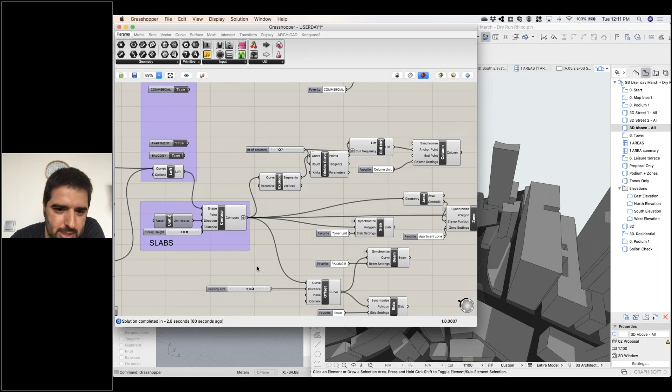Okay, I have to go and check the balcony because the curves went inside, not outside. That's why it was giving me that error. Sometimes restarting the connection will sort it out. Can you guys see the balcony is offsetting inside? So I have to fix the script or rerun it to see how it's doing the offset. Okay, so let me just break the connection for a while.

I want to show now in ArchiCAD the area schedule that is generated from here.

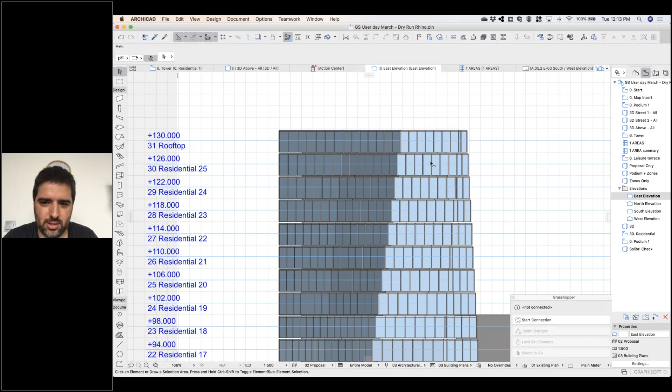Question, sorry. Yeah, there's a question: if you turn off the shadow, will the model generate faster? Yeah, for sure. I always like to show things nice, so that's why I like to show it like that. And to be honest, it doesn't make that much of a difference, so I'm okay with showing it like this. One thing is you can even have settings for working and settings for presenting.

So I wanted to show you here that the whole area schedule is being set from this model I have, and then I can have the area summary. So let's say commercial, I have this area, residential, I have this area. And if for some reason we decided that our tower, we want to have a little bit more area, so we want to arrange the shape of this curve and make it, I don't know, any other shape.

The interesting thing is once you start the connection again, you see this contour. At the moment, what came from Rhino was this. So once the connection is going again, it starts replacing the whole area schedule, the whole elements, and your area schedule will reflect this. So you see, this is what it's doing in Rhino.

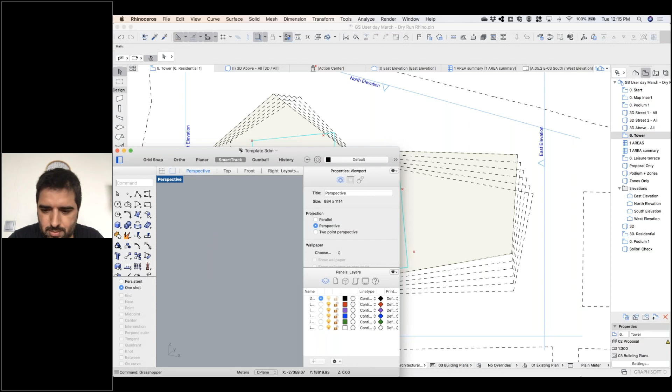And the Grasshopper script is rerunning all over again to make sure that it will recreate now the slab with this shape. So you can now go to 3D, see that the shape has been updated. And if I check my areas, naturally the area schedule will also be different.

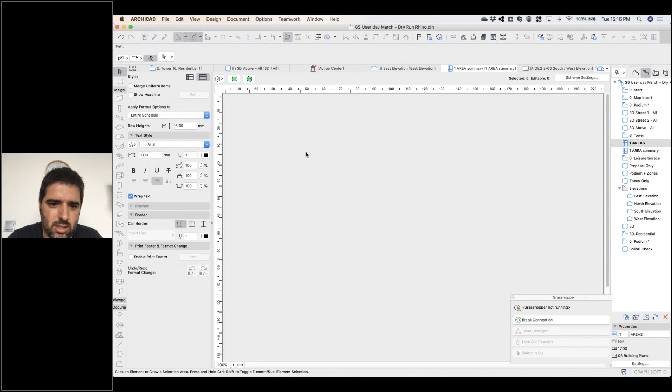Yeah, well, I think it's still doing the change. It looked like it was already done here. Yeah, so basically now the change is done here. Let me see the area. Yeah, I think that this is already reflecting the new areas. 41,000.

Okay, so pretty much this is it, what I had to show for you guys today. We still have 15 minutes left to go through some Q&A. So is this something that you would see yourself using in your practice? There's actually a lot more that can be shown. This is just again for the early design stage.

I wanted to highlight that, you know, doing these changes using a Rhino Grasshopper approach is even faster. Obviously, to come up with this recipe to do the script, it takes quite some time. But once you've done it one time, you can do it for any project and with any shape. Okay, so this is pretty much the message I wanted to give to everyone.

If somebody else has further questions or wants to turn on the mic and ask something, I'm okay with it. Just let me know. Okay, so no questions, everyone is shy.